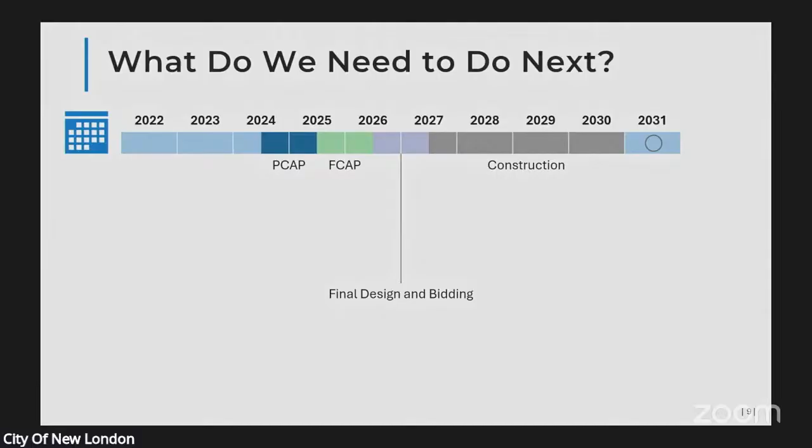But why are we in such a hurry? One could say, I look at that and it looks like we might have a little flexibility on the back end, we've got an extra 6 months. Could we talk about this some more? There's an expensive, that could be an expensive delay.

So right now, we are targeting state fiscal year 2027 Clean Water Fund money. The fiscal year runs from July 1 through June 30th. So we are targeting state fiscal year 2027 Clean Water Fund money.

New London will get $3.1 million, $2.1 million in general principal forgiveness. Principal forgiveness is like a grant, it's free money, you don't have to pay it back. You'll get $2.1 million in general principal forgiveness. You'll get $1 million because you need to meet a phosphorus limit, and your community qualifies for that.

This is the last year where that will be as lucrative as it is. After state fiscal year 2027, the phosphorus funding may go away completely. The hardship, or the $2 million pot of money, that will become more competitive. So you run the risk of getting considerably less than $3.1 million. There'll be a lot more competition for less money after state fiscal year 27. It's entirely in the realm of possibilities that that could go to zero or something much closer to zero.

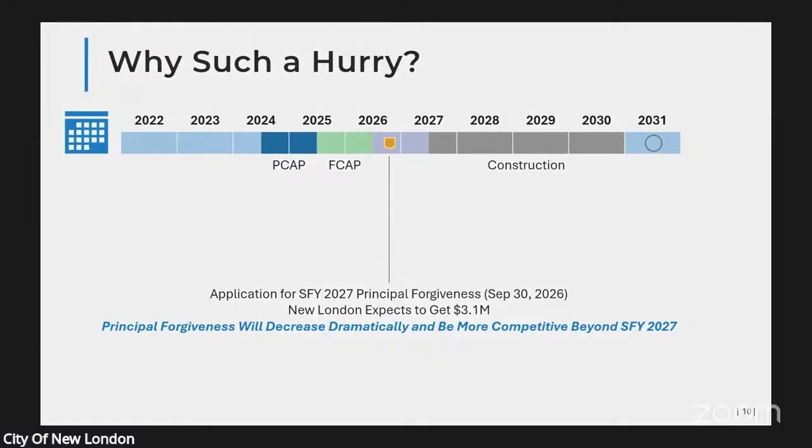And the future is uncertain.

So what are all 300 of these pages? What's a facility plan? Number one, it is a gateway to Clean Water Fund money.

And why do we want Clean Water Fund money? Well, number one, $3.1 million in principal forgiveness. Number two, the interest rate for you guys would be about 1.48%, subsidized, federally subsidized. Everybody in New London has paid for that federal subsidy. It's your opportunity to get your share of that federally subsidized program that buys down the interest rate to less than 1.5%, which is a pretty good interest rate these days.

So the facility plan is a requirement for the Clean Water Fund. It also defines the environmental impacts, but most importantly, the facility plan serves as your 20-year roadmap for your wastewater system. It looks at the current situation, it looks at what your future situation is. It identifies the challenges, the issues that you need to address, looks at potential solutions, alternatives, and then ultimately it recommends what the community feels, not what your consultant feels, what the community feels is the right investment for the community. That's what that 300 some pages is that was in your packet.

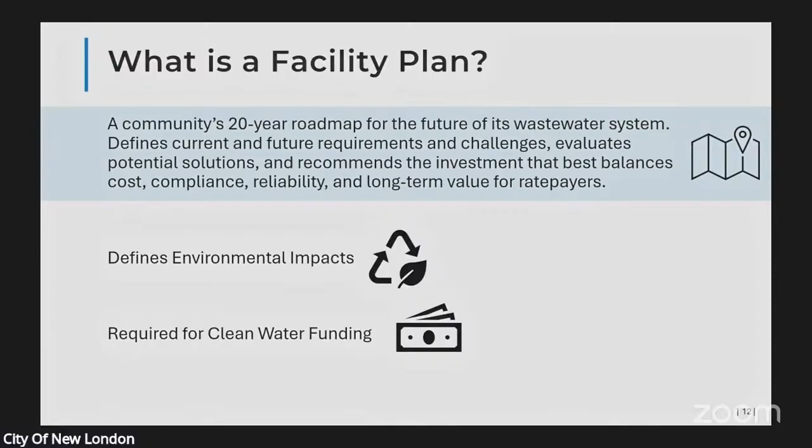So we looked at 7 different alternatives. 4 of them are focused exclusively on the phosphorus issue. That's the most pressing, from a timing standpoint, that's the most pressing issue. So number 1 is do nothing. Sounds silly, but we had to prove to ourselves that we need to show the department that your existing facility can't meet that limit. That's well documented. You guys do really well, but you can't meet that limit.

So do nothing is not a feasible alternative. The second one, we've talked about that in the past. There's a program called the Multi-Discharger Variance Program. It wasn't available the very first time we talked because it was going to end in 2027. It's been extended to 2035. Remember now your compliance deadline is 2031. This could buy you 4 years.

And what you do is you pay for every pound of phosphorus. I think you pay about today, it goes up every year. Today you pay about $67 a pound of phosphorus. You could use that. It costs you about $70,000 a year. The money goes to the county. The county uses that money to do things out in the watershed to reduce phosphorus getting to the receiving stream.

So it's a viable 4-year solution, about $70,000 today. But it doesn't address the other three things that we talked about: the age of your facility, the complexity, the obsolescence of it, and your lack of flexibility for the future. So come 2035, you would have to do something. And you'd need to start planning well in advance of that to do something, okay? And I think when we talked about it before, there wasn't a lot of interest. All that money's gone, and you get nothing in return for that other than the time.

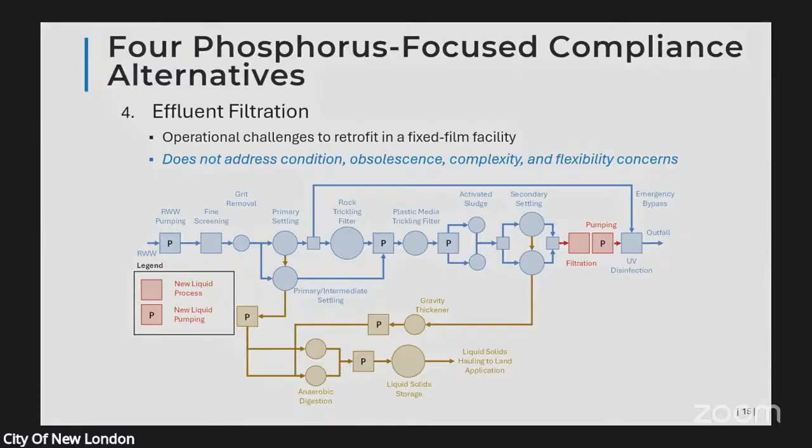So that brings us to the 3 alternatives that look at all 4 of those issues, the full facility alternatives and the generational investments. The alternatives that are going to address all these issues and get ready for another generation of service and ideally well beyond. So the first alternative is alternative 5.

What we're showing is a site plan. And what color do they look like? Kind of that teal color is highlighting all of your existing buildings, all of your existing infrastructure. All of those would be upgraded. The equipment would be replaced. The electrical gear would be replaced.

We added the replacement of a bunch of the pipes that get flow from one place to the next, and all the construction cost for all the sequencing and bypass pumping that would be required for that. The intention of this alternative is to give you all new equipment and retain the infrastructure, the structures, with the idea that all 3 of these alternatives are really intending to set you up for the next generation and beyond. That's what that alternative is. It's a completely, this old house rehab of your existing infrastructure.

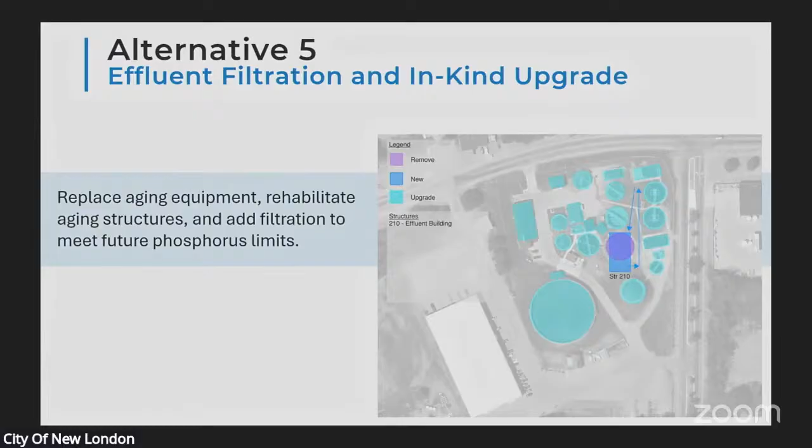There's one structure that would be removed, and that's the circle in purple. Purple up there, yeah. And that's where we would - it's the only place we could put it on your existing site. That's where we would build the pump station, chemical mixing and flocculation, and the filter.

So if you were to move forward with that, you would achieve compliance with the phosphorus limit. You would have a new filter system, but it would keep your existing plant as it's configured. Okay, it would actually make your complicated facility more complex. You would continue with your current dilute Class B liquid biosolids program.

One thing that it doesn't mention here is it would not set you up for biological phosphorus removal or biological nitrogen removal, so you don't have the flexibility to accommodate a future nitrogen limit. And that's important because if that, when that day comes, the only way you would meet that nitrogen limit is if you added yet another process to this that removes the nitrogen. So you make a complicated facility more complicated, and in the future we get more complicated yet to meet a nitrogen limit.

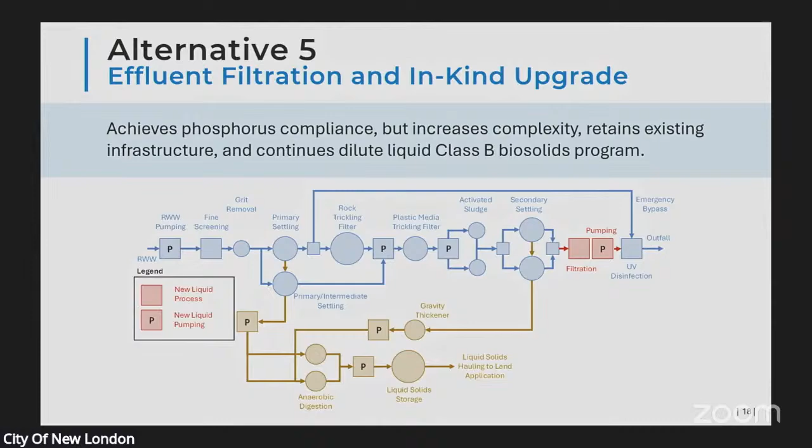Let's look at the non-economic advantages and disadvantages of alternative 5. This is the old house upgrade where we add filtration, so it would comply with phosphorus requirements and replace or rehabilitate your existing infrastructure and equipment. Relatively speaking, its capital cost is lower than the other alternatives. We'll spend more time talking about costs in a little bit.

Its disadvantages: it doesn't address the obsolescence and complexity. Your plant is still designed for a previous era. It lacks the liquid train flexibility to treat water for a future nitrogen limit, and lacks solids train flexibility to deal with your Class B liquid biosolids program. There's far more construction risk, as we discussed at the plant. Think about sequencing the work while keeping the existing plant running. Anytime you're doing rehab work like this, the probability for change orders is much greater. And this would actually have the highest operating cost annually.

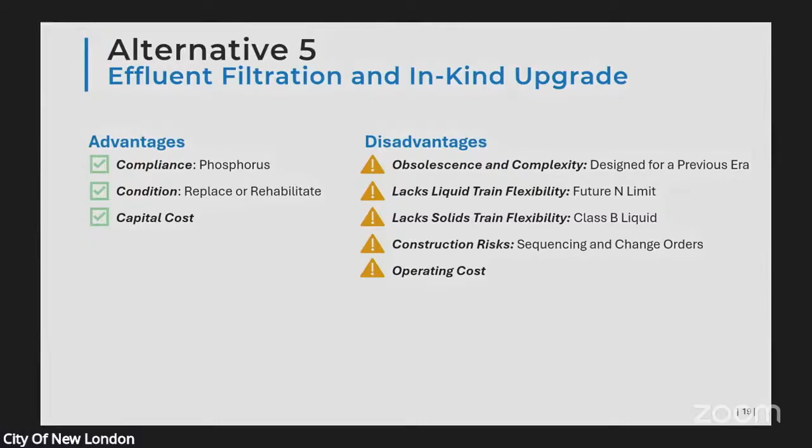Alternative 6. For those of you that remember these conversations, I did change the numbers a little bit from the PCAP, because I wanted to make sure we did those 4 alternatives and really plowed all the ground necessary for alternative 5. So forget the numbers we talked about before, and remember alternative 6 is a new facility with Class B biosolids.

This is what we're showing, and we've been working with your team to develop preliminary drawings and a preliminary design for this alternative, as well as the next one we'll talk about. So for alternative 6 and alternative 7, we've developed a preliminary design, and the reason for that is to make sure we've got far better cost certainty for these alternatives than we had when we did the PCAP.

The only way you can really increase your cost certainty is if you get into the details, take some soil borings, look at where you need piles, work with staff, and come up with a plan to meet all the different requirements.

To give you a sense of it in round numbers, the PCAP was done in about 200 hours, and now we've spent about 3,000 hours with different engineers helping us, because there's going to be a public hearing at some point. We want to be able to stand up in front of God and country and the public and have as much certainty as we can about the construction costs. A lot of decisions need to be made and a lot of information needs to be unearthed before we can have that type of confidence. That's why we've spent the time and energy we have to get to this point.

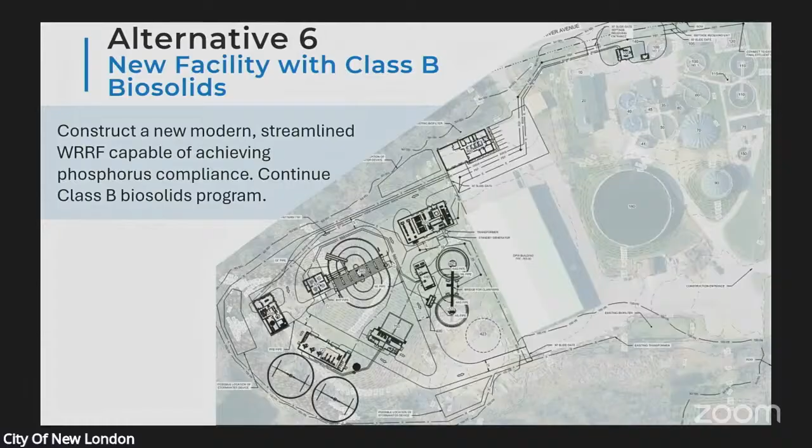Okay, but this is a modern day streamlined treatment facility, much simpler, much more in line with today's effluent limits, and one that's been tried and true all over the state. It really doesn't get any simpler than this. Here we're showing it in schematic form. What's in gray are those liquid train processes I talked about. What's in brown are those biosolids processes I talked about.

You store the WAS briefly, you thicken it, and you put it in storage tanks, and a truck would haul that liquid to the fields like it does today. It would just haul less of it. Okay.

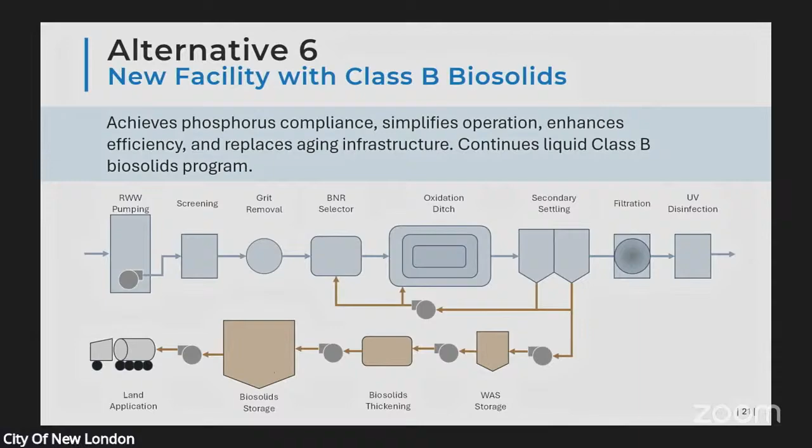Alternative 6 is a brand new facility with Class B biosolids, liquid biosolids. What we're talking about is making a conversion from a complicated process that has a bunch of fixed film in it, to one that doesn't have any fixed film.

It has only activated sludge. I think at a time like this, it's helpful to know — has anybody else done this before? This is a very common transition that a lot of your peers around the state have done. Everybody that I've listed here at one time, or currently, has a fixed film process, and they have converted their facility to one that no longer has fixed film.

Okay, so a couple of them have asterisks. One is Reedsburg. Reedsburg was similar to you guys — they had a trickling filter because of their industry. Reedsburg is currently building a brand new facility. They're a little bigger than you guys, more around 3 MGD. You're about — an MGD is 1 million gallons a day.

You're about 1 million gallons a day average. They're about 3, but they're building a brand new facility. They opened bids in 2024, brand new facility, very similar. The process flow diagram is very similar to yours. They opened bids at $109 million in 2024.

Jefferson, Wisconsin, they have fixed film. They're contemplating a change right now to only activated sludge. They're targeting $140 million. Again, they're a little bigger than you guys.

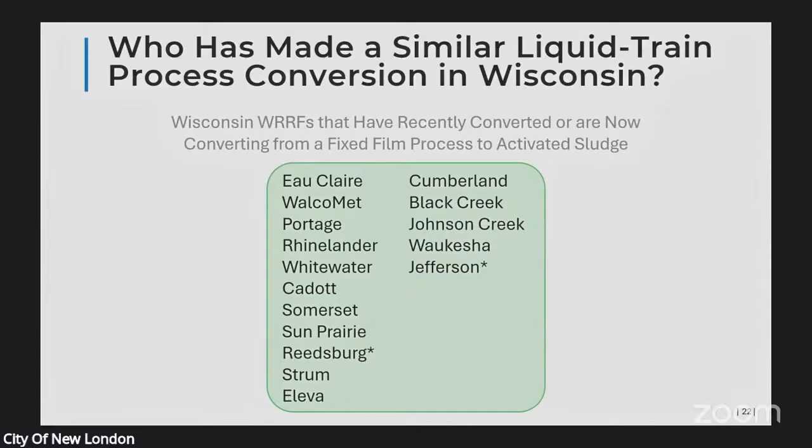So if we look at the advantages and disadvantages for Alternative 6: it'll achieve the phosphorus limit. This does address the condition of your existing facility — most of your plant is 40 to 70 years old. It addresses the obsolescence and complexity we talked about. A streamlined facility incorporates biological nitrogen removal to better accommodate future nitrogen limits — that's the liquid train flexibility.

Construction risks — we talked about this at a previous meeting, that's why we went to the sledding hill, it makes it much cleaner for a contractor and reduces the potential for change orders. As you'll see, it has a more favorable operating cost than Alternative 5. Its disadvantage is it checks most of the boxes, but it still relies on this Class B biosolids program, and it's more expensive than Alternative 5 as well.

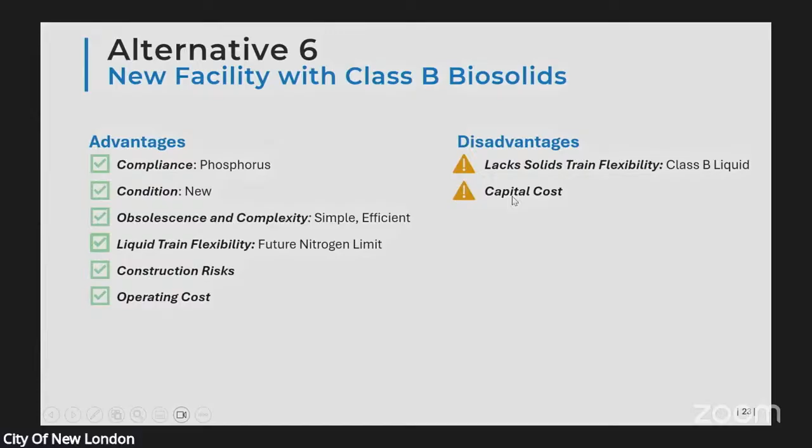Those are the disadvantages. Alternative 7 — now, this is the one that we spent most of the time talking about. It's finally getting there, what we've talked about most of the time.

This is a brand new facility at the sledding hill. The liquid train is identical to what I just went through.

But on the biosolids side, we would temporarily waste our biosolids to these two tanks here, and then we would pump those to this building. This is where it makes Class A material. In this building, we would dewater them.

We would squeeze a bunch of the water out of the solids, and we put it in a dryer, a heat dryer, and we would make a biosolids pellet, very similar to Milorganite, if anybody's put that on their lawn. That becomes an unregulated fertilizer product.

People that have put in dryers have found they work with local landowners, and the landowners say, I'll take all of that you've got. And so the hauling cost goes to zero. The landowner says, I'll come get it, and I'll bring it to my farm.

In one instance, we helped Sheboygan put in a dryer. They're actually, I think, going out to bid, and I think they make about $150,000 a year or something like that. But it's not worried about the revenue yet.

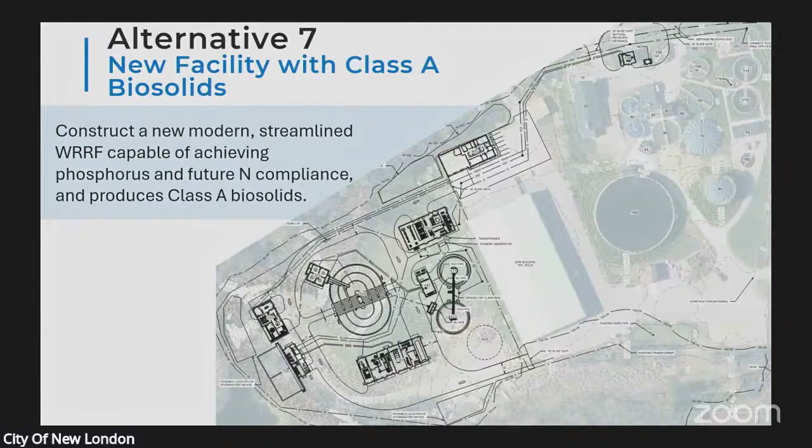Again, here's the liquid train, it's identical. Again, BNR for biological phosphorus removal, and someday biological nitrogen removal.

Oh, I put the wrong schematic. Oh no, I didn't. We have temporary WAS storage, the brown is the biosolids. We dewater it, we put it in the dryer, and then it goes into a trailer that a farmer could haul to their field.

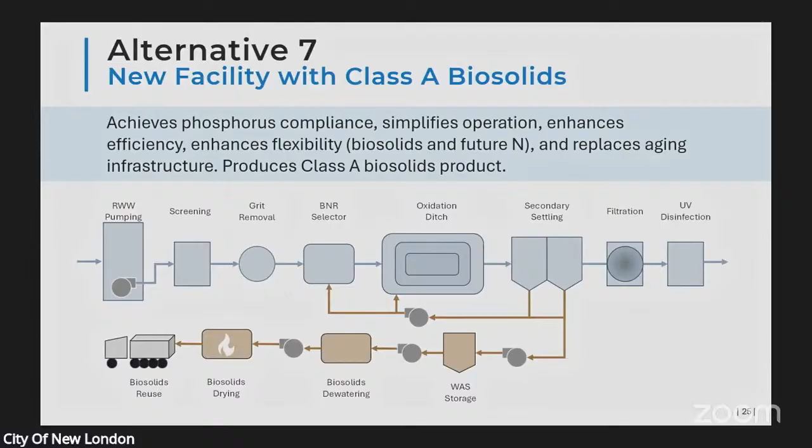That's alternative 7. It'll achieve phosphorus compliance. It's a simpler facility, it's more efficient to operate. It's got the flexibility for the future, and it replaces all your aging infrastructure and produces a Class A biosolids product.

So, are we contemplating something that really nobody does? There was a time, and it wasn't that long ago, Milwaukee was the only facility in the state with a dryer. It had it since the 30s or something.

But in the last decade, we've seen a lot of people get interested in biosolids drying and putting them in. What we're listing here are facilities that either have dryers, they're under construction, or they're pursuing them through a facility plan. You can see there's been quite a proliferation in the last 10 years for facilities, and not all of them are Milwaukee, Green Bay, and Kenosha. A number of those facilities are similar in size to New London.

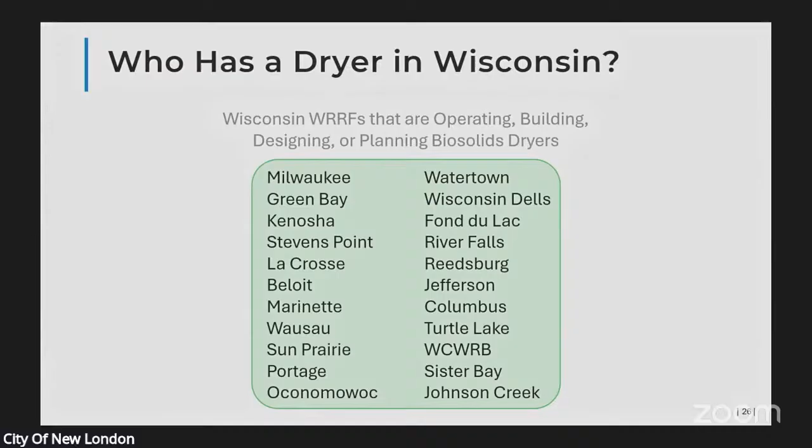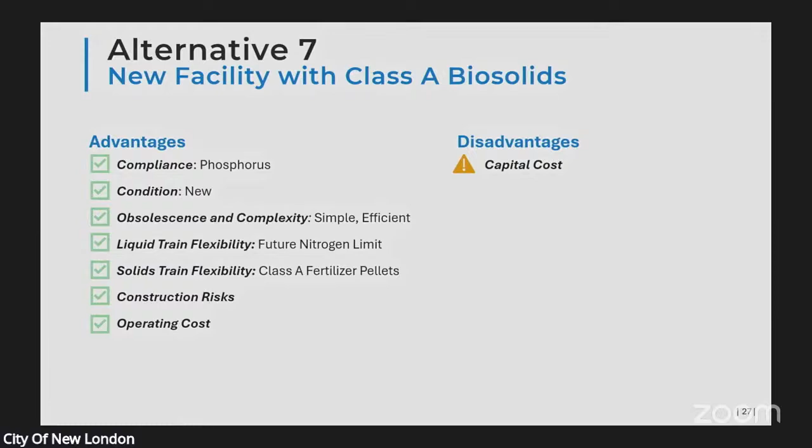So if we do a non-economic comparative analysis, here we show the three alternatives lined up: compliance, condition of your aging facility, obsolescence and complexity, liquid train flexibility—that's to accommodate a future nitrogen limit—and solids train, someday.

Biosolids, Class B biosolids could be prohibited. Well, in Maine, they don't allow it at all today. Your one salacious story, maybe won't be science that rules out Class B as an alternative. It'll be elected officials responding to something in the paper, something in the news, someone's got sick, that could remove Class B as an alternative.

Maine has eliminated it, Texas and Oklahoma are taking steps. If you have a Class A product, you only have 10% of the weight of the material that you could use, even if they said no more biosolids on land. You're left with 10%, and it makes landfilling very cost effective.

And then the construction risks—both of those 6 and 7 are built on a new facility—dramatically reduces the risks associated with construction. So here we get to costs.

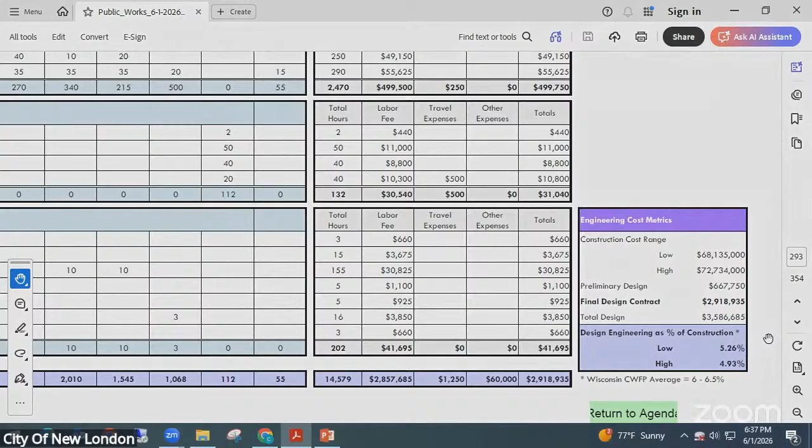Any comments on that? Seeing none, if I hear none, we'll look for a motion. I'll make a motion to approve and recommend agreement with Donohue and Associates for treatment plant facilities. Motion has been made. Second. Motion made by Mr. Ritchie, second by Mr. Dorsey, to approve and recommend agreement with Donohue and Associates for final design of the wastewater treatment facility based off the council's approved wastewater treatment facility plan option. Any further discussion? All in favor signify by saying aye. Aye. Opposed? Motion carried.

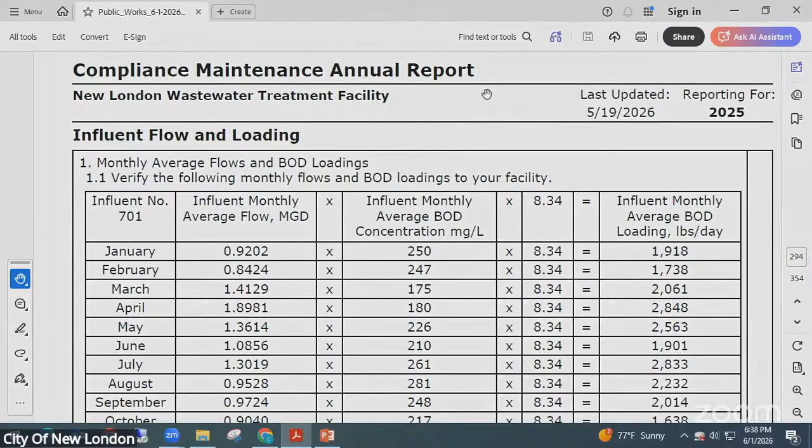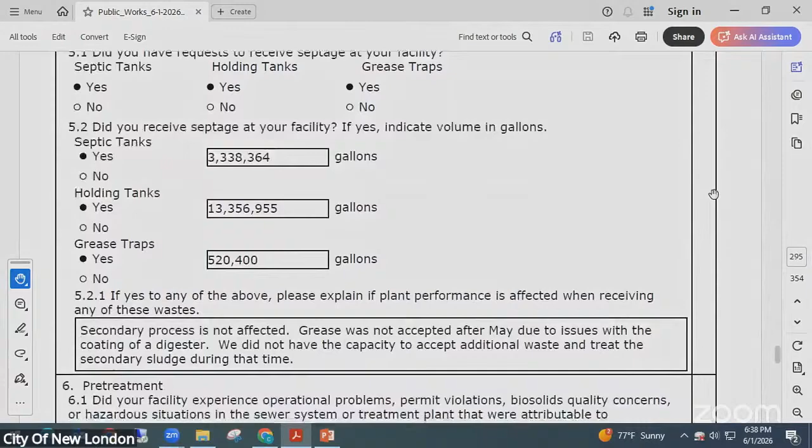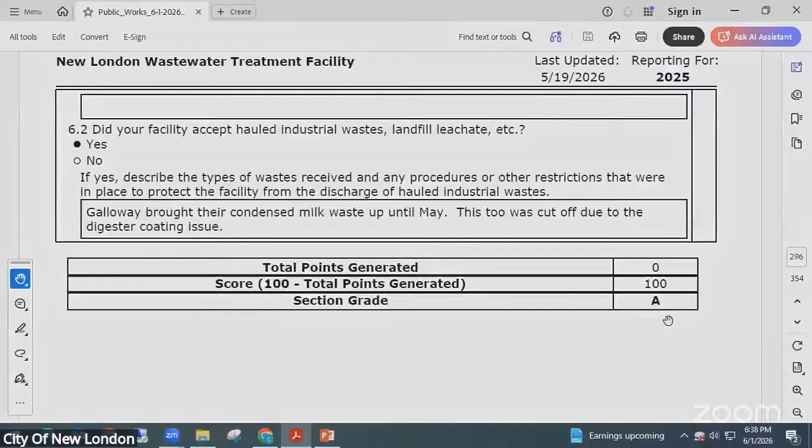Let's move on to approve and recommend to council the 2025 CMAR resolution. Does anybody have any questions about the CMAR? As Mike went over, mathematically we have gotten an A, but mathematically, when they do give us that new TMDL, we will not make it just because of our flows coming in and how old our infrastructure is. That's one of the whole reasons why we just had this hour-long meeting. But does anybody have any questions as to why we got these grades, or anything CMAR related?

Because we do have to pass a resolution that I have to submit to the DNR at the end of the month. Anybody got any questions for Ben? Hearing none, I'll look for a motion. I'll make a motion to recommend to council the 2025 CMAR resolution. Motion made by Mr. Dorsey, second by Mr. Barrington, to approve and recommend to council 2025 CMAR resolution. Any further discussion? All in favor signify by saying aye. Aye. Opposed? Motion carried. Thanks, Ben.

Thank you, and I realize this isn't the best. I don't know how to say it. It's a big project that's coming up, and we appreciate going with the one we did. It's gonna make everybody's life much better in the future for our taxpayers, our ratepayers, and everybody. So thank you very much. Thanks, Ben. Thank you. I just want to make a comment to everybody at the wastewater treatment facility. It is amazing, considering the flood that hit New London, that our wastewater treatment facility didn't fail, that we maintained compliance. That is a huge shout out to all of you who were down there, because I know you were down there working overtime and doing everything to keep it running and compliant, and we didn't have any issues with our water in New London as a result. So huge shout out. Thank you.

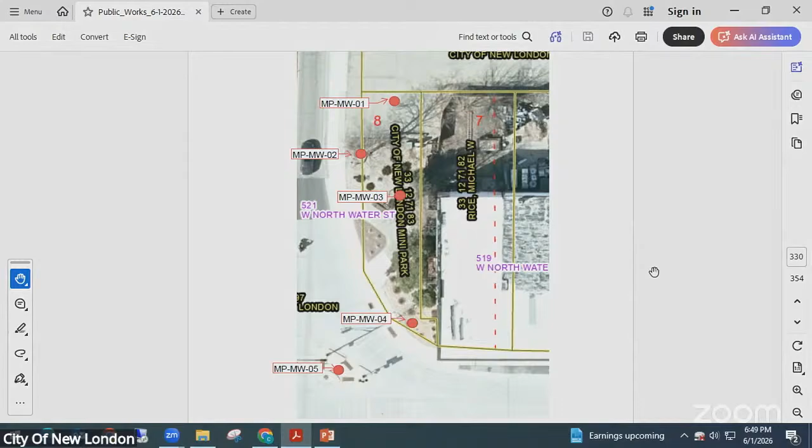If you scroll a little more, there's one well in that pedestrian harbor area. I was talking with them, trying to get that moved because there's natural gas running north-south, and I know we have one main electrical feed running right under that sidewalk that was previously hit during construction. So I'm trying to have them relocate that to another area, but they want us to put in these 5 monitoring wells, do 2 rounds of testing, and from that determine what we need to do going forward with this site based on the locations and testing done.

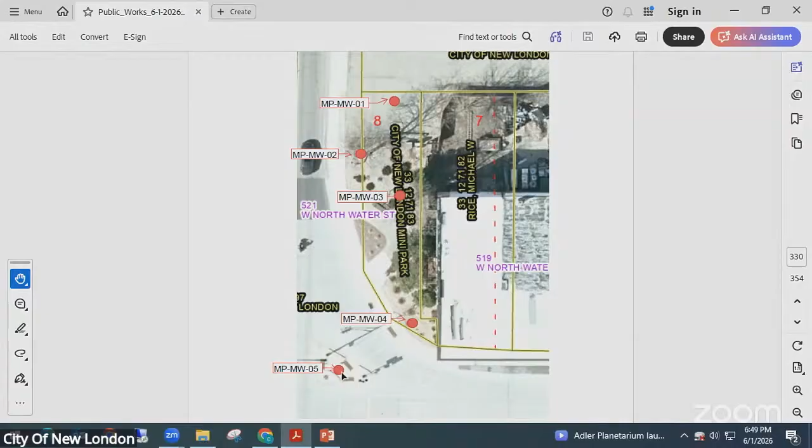I looked back at a little history, and I think the city took this on in 1971, when it became city property. The map I put in there from 1976 was kind of when that corner was reconfigured. Donohue did some work on that to make that turning lane, but as far as I know, it's been city property since 1971, and these plans were drawn up in 76 to make that turn lane.

Being that that's city property and the DNR assigned us the responsible party letter to that, we have to go forward with monitoring the site to see if any of the potential contaminated areas where they took the two tests has migrated any further to the north or further out into the roadway.

How long do you think you'll have to monitor them? I'm hoping that the tests they take between the two stay consistent and they determine that it's not migrating, or that groundwater isn't shifting this, and that we can go through that final process, like we did at the Associated Bank area. The other option is to dig it up.